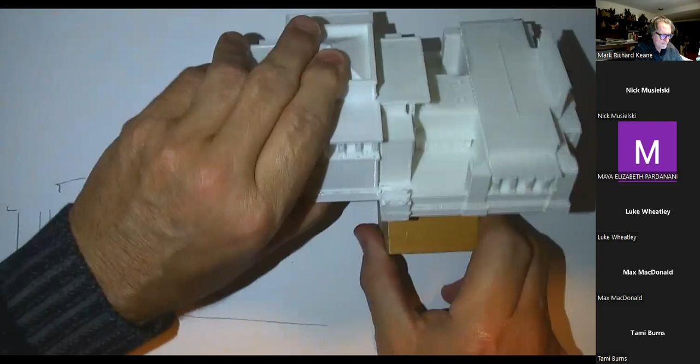Although, here's a point in reference about being a Madison student. Frank Lloyd Wright was born in Richland Center in 1867. I think I made mention of that in your email earlier. And he does well as a student - we'll talk about how he did so well as a student later on, because his mother was very controlling about how Frank was perceived as a child. And eventually he gets into college engineering at Madison. He fails in his second semester and never returns to college, and then becomes one of the 4 modern masters of architecture of the 20th century.

We're going to talk about how that can possibly happen, to go from Richland Center in South Central Wisconsin, not complete college, and then complete the most distinguished American architectural career, where he's the only architect that's been on Time magazine more than once. He's the only architect brought up to the level of Mies van der Rohe, Walter Gropius, and Le Corbusier at an international level. The other 3 went to colleges. The other 3 worked through sort of the language of the modern movement and the connections. Wright did his work almost singlehandedly with a lone quality, a lone wolf in the suburbs of Chicago, until he reached acclaim in 1909 and had his first international book published on his work.

So that's the story we want to kind of bring out and tease as you work through this and move through this process. So what I'd like you to do now - we're not going to draw now, we're just going to write and sketch. Get a blank piece of paper. We're going to work on the structure for the class in terms of how you work it into what you know about social histories and the language of the 19th and 20th centuries.

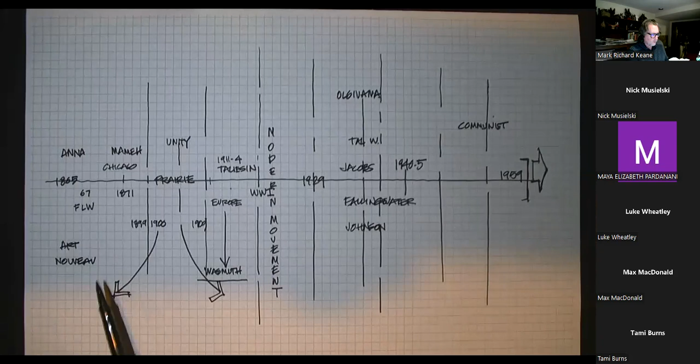And so that leaves us with the aspect of what Wright has meant to others, and that's what's in the book towards the end when we start to draw that. You'll see not only who worked for Wright in his studios, whether it's here or at Taliesin proper in Spring Green or in Taliesin West, but then who did he affect - who were outside looking in at his career?

And how does that idea of organic architecture still hold true today? That's sort of the path we'll talk about as we move through the book. So that's kind of the timeline that'll take us to where we are now and see what the language of Wright is here.

Getting back to this diagram, that's the part we're concerned about now, as architects in the Midwest and even internationally are concerned about, as these four seem stable. Jacobs is connected to the campus, and a retired art history faculty member brought that back to life. Johnson Wax is in place, the Robie House has been restored, and they've restored Unity Temple.

It's Taliesin now, which is the grand idea, because most of these projects emanate from it, outside of the two early ones. Falling Water, all of his major work from 1911 on, came from Taliesin. So not only is it a great home, it's also his think tank, his laboratory of ideas. That's where this whole push toward design, and what you could do in your careers, can make sure that's an integral part of the future of thinking about design in the Midwest.

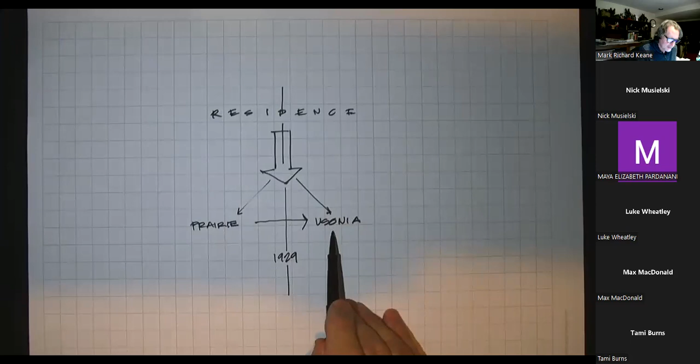They had more money, they came to him for the image of it, and they beefed it up, ending up with maybe a $500,000 home. But there are no really multi-million-dollar homes scaled in the early Usonia days. Maybe as more people became attracted to them, they got bigger and bolder and finished differently, but this is a different audience. So I want you to think about which path you'd like to take and work within that design language — that's your first choice. That's job one.

Because I'm assuming that's why we're all here: we want to design a home. And it's not something you can't do, because it'll take you less than a third of this class to do this. I'll show you all the principles and pathways to make drawing a home an easy thing to do, and how you're paid for it professionally, so you can run a career in residential architecture and make money as well. So the second step you have to choose is your site.

For many of you, this will be fiction. You'll find a piece of land, search on Google Maps, search in your neighborhood, or search on family property you might own, friends of the family, something up north. It could be a cabin-sized place, or it could be something opulent—you can design a palace. You're going to have a real client or a fictional client. You decide that too, or you could be your own client.

So those are the three things I want you to consider as you read the biography, as you draw in this class, and as you think about the ideas of Wright—his ideas that he's trying to purport, or the better way to approach design. You'll only show that you understand that by designing something with that language.

Your pathways ought to be very controlled here, because among our 55 students, there might be enough to shake it out so we have an even number on both sides. Then that group is going to self-critique each other, and this group will self-critique each other. So we split off. You might even have subsets within that to get you to dial in with 4 or 5 people doing something very like your scheme, because maybe the sites will be different.

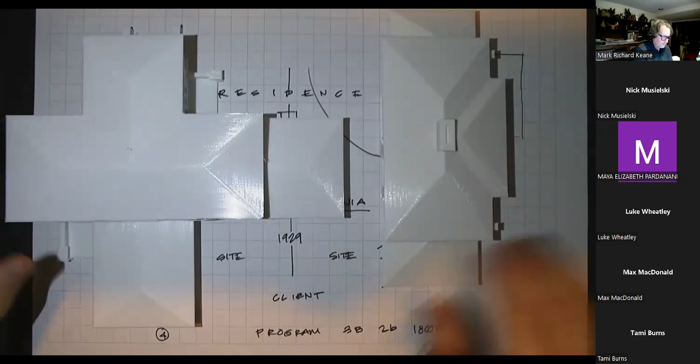Here are 2 prairie homes in plan type. They're both prairie homes. They both have the same type of roof pitches and stuff, but they have different clients and different sites and different scales. So they're part of a family of ideas. The same will be true for all the Usonian homes from the 30s on, without the pitched roof, without the basement, with cheaper materials and more of a manufactured tool type of detailing system.

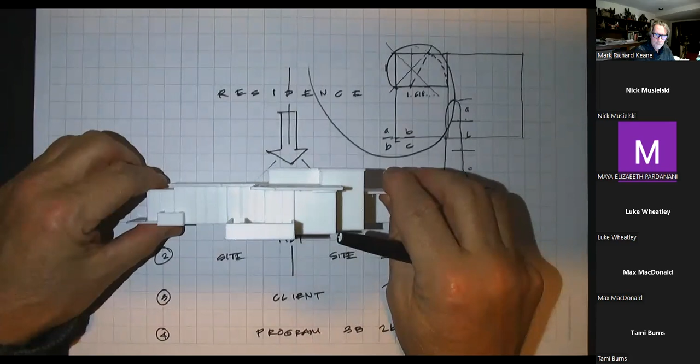So as you discover in the book, on your research, as you move about, as you travel to sites, you'll be drawn by one or the other. And you'll tell me in a couple of weeks which path you're going on, and then I'll have you do some presentation work for ideas. We'll draw some in class together as prototypes so you see what we're looking for. And all we're looking for in terms of the semester, it's not working drawings, it's not going to be Revit.

For those non-architects in the class here, there are 5 stages to doing, let's say, a residence. So the first one is schematic design. And that's what we do in most studios and most collegiate things. We just talk about the design of it in its sort of infancy. And rarely is it ever articulated.

Sometimes maybe in a senior level studio, sometimes in a graduate, you can get to design development and kind of complete all the design. But sometimes projects stop even at this point because it might be bid out kind of prematurely, and say, well, we're way over budget and we can't continue, when the client walks away.

If you do a good job, you take it to a point where you're moving towards the CDs, which are the blueprints. So the architect is doing 3 big phases here before anything breaks ground. It's all drawings and ideas about what everything's going to cost, what design decisions between the architect and the owner are going to be. And then you bid and negotiate with a third party, the contractor, and then you construction administrate, which means you build it. So if all phases work out, you have yourself a home for the prairie or the Usonian.

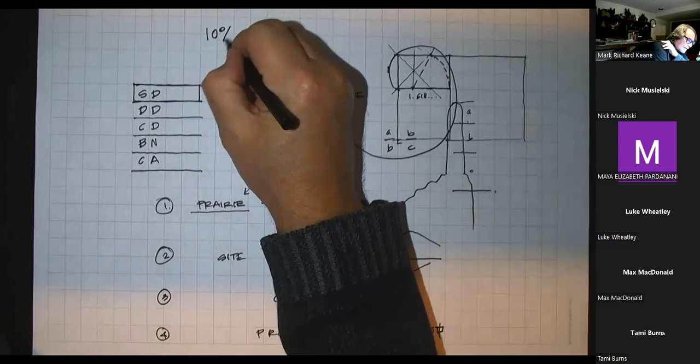Basically, after a certain time we'll give you a score for 10% based on your progress. We'll check back again around midterm and see how you've realized that, and then it's time for substantial feedback. When you're done, you submit it at the end of the semester, and it's reviewed in its entirety—the process as well as what your final project looks like. That's a chunk of your semester in terms of points towards the final grade.

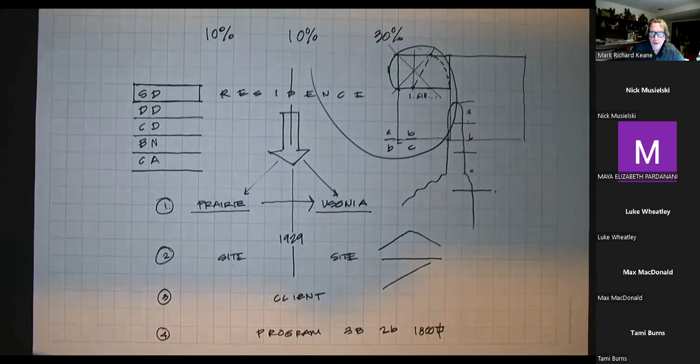Okay, so now you've got enough time to embark on the main course, which is always to draw within Wright's realm. For those of you who printed these out from the online file I sent, look down on the lower right and find the unit for Unity Temple, and follow with me on the architecture of this in the media of choice—Frank Lloyd Wright's choice.

You can do it in regular pencil now, or any media you want, but I'd like you to drift toward what Wright did in terms of working through all of his architecture—he worked with Prismacolor pencils. By and large, all of his renderings and design things, that was his drafting tool of choice, until it came time for his staff themselves to do the drafting. Then they switched to harder leads.

So I think for the bulk of the semester, since we'll have probably an hour each Tuesday to draw something, we'll stick just with black. But you need a whole array of them, like 5 or 6, all sharpened, instead of having to stop and sharpen during the sketch, so you can go for the whole duration and have it complete within that time frame.

If it gets too advanced or too fast for you, you've got that file you can go back to, reprint this, and start again, collecting the ideas there. By your second or third attempt, you'll be able to keep up probably stroke by stroke with this as we go through it. Later I'll move toward something more of a spectacle, when Wright would actually render fully in color.

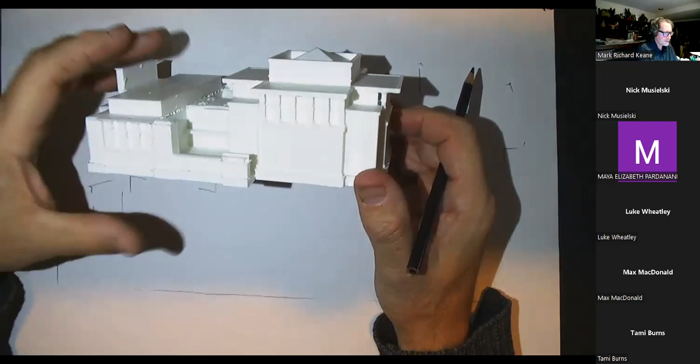So here is our view shed of the temple, started in 1905 and completed by 1908. We're looking from the parking lot side, because the street side has got a lot of vegetation and changes over the years. This is actually a cleaner image of the site that we're going to draw it from.

What's nice about it is the building itself is cubic, so we're going to start with that language and get it correct, then build all the other planes that fall off it to the left and right, north and south of the site. In all of our views, you can find great sensational drone pictures and odd angles, but I really like to have them drawn as if you're on the site and walking up to it.

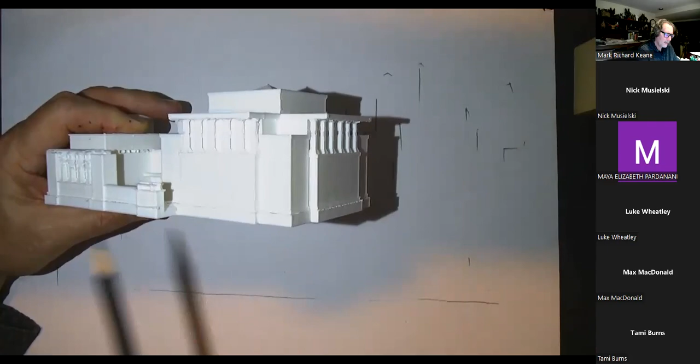So what we're going to work on then - I'll come back to the model periodically as we go, holding it up here in my left hand - is we simply want to find that horizon line. The tick marks show you that if you came off some of the horizontals I've articulated up here, you'll see the left vanishing point is coming off the page, and the right vanishing point, which is much closer to us, is driving down much quicker.

So they're both off the page to the right and left on 11 by 17, but now the bottom where the parking lot ends is beneath the horizon line. So we know those two are going to come to a point, and these two are coming to a point, organized by somebody 6 feet tall with a camera on this site. So all the way across here, absolutely parallel with the top and bottom of the page, is the horizon line.

So our first job is to grab the 5-fold openings here and drop that box down to ground and to its top, and the plane up above, which will protect that box in its day. And then the zones that we find on either side of this box, the pure cube, just like this was, we drew a second ago. And then when it comes to the corner of the plate that returns, I've drawn that here, and this one's going to turn, this is going to vanish back to the opposite point, which is on that horizon line. So somewhere between this line and that line, you're going to vanish that back. And then here, it'll be parallel to that, and then I'll come back to.

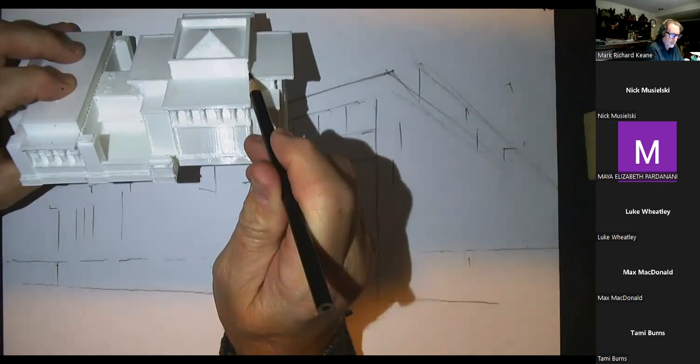We have a little bit of a bump out for the skylighting above the main space, which elongates the square into a rectangle. And we see one corner of that, but from this view, it dies back into this. We don't see it popping up beyond that. This comes down beneath the eye height of somebody standing next to it, and it's got a little bit of a base material that projects out as if it's got the feet of the cube being protected. And now that's going to rise from this corner back to this point off the page.

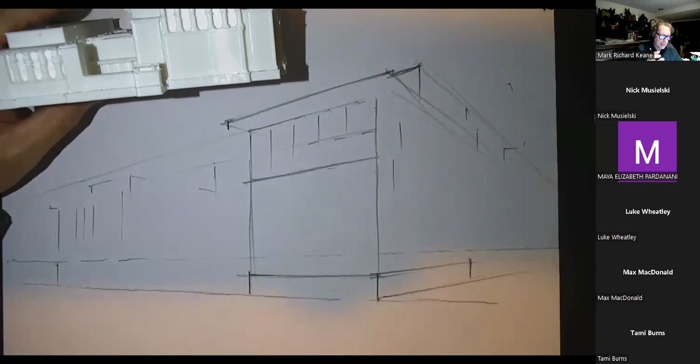So the reason why this is so epic too is that it was almost a budget issue that made Wright become more creative than he naturally was in the prairie idea, because those wealthy people had a lot of money to spend on some opulent materials. Here was a congregation that lost their building in a fire. And when they came back to build it, the budget, believe it or not, back in the day was $45,000, which is pretty modest. Even if you use that with inflation of what it would be today, you probably couldn't build this today. But Wright used what was probably the only material he could do to build it for the budget he wanted.

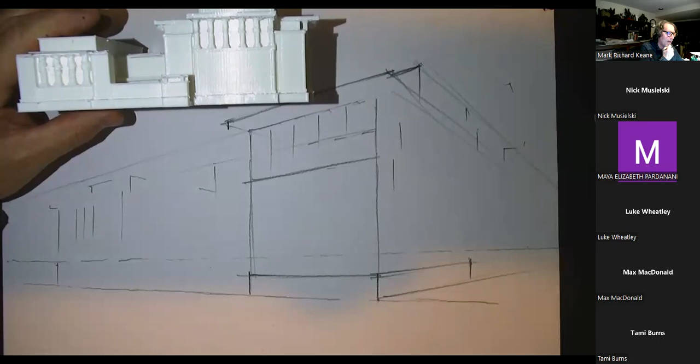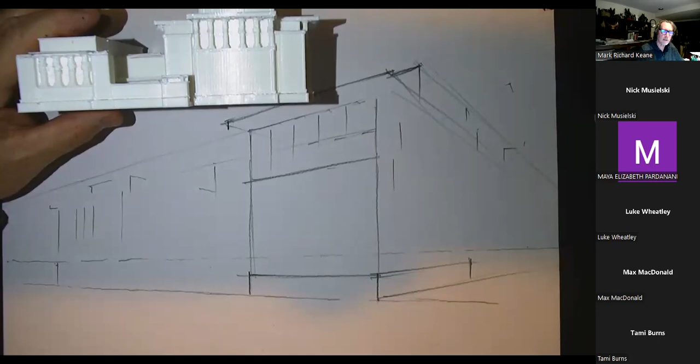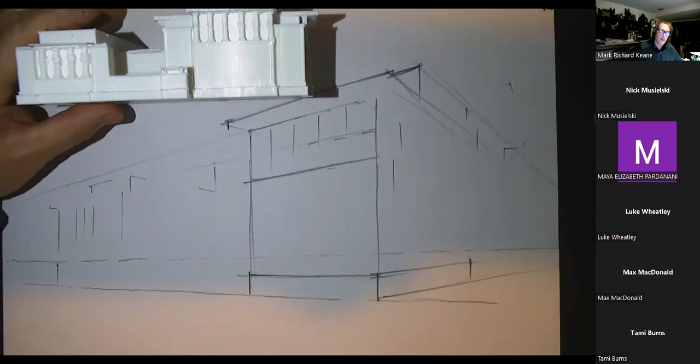And that was that single aesthetic change, the modern movement of reinforced concrete. So a lot of people historically, at this type of scale, consider this to be the first modern building in the world. That's why it's on this UNESCO site, even though it's still spectacular, even if it wasn't the first, because it was innovating with the material of the 20th century. They still call it a modern building, even though it's really within this Art Nouveau realm, because they hadn't talked about modern architecture as an actual field of history. Because really the word modern is Tuesday at 4 o'clock, anytime in history, that's modern architecture with a small m. Modern with a capital M is actually a stylistic period in the 20th century. And Wright's part of that before it begins. Again, that great anomaly there.

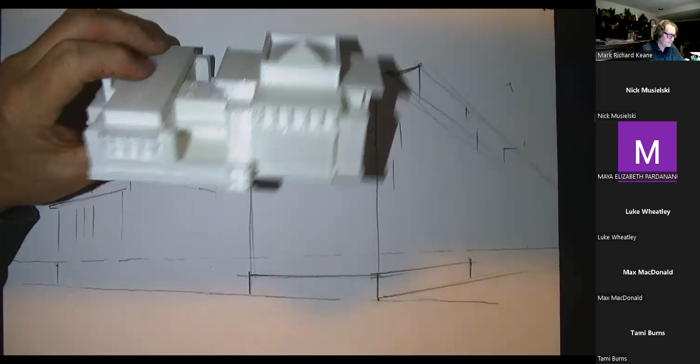So we'll come down to the other wing here and find the same type of patterns there, where there's an initial movement of pieces that fly up and a return down the corner that comes over on the side. And some of the pieces that you might see in the distance as the cube completes itself are going to be out of our vantage point because we are so low compared to the height of the building. As I tilt this up, they fall out of view.

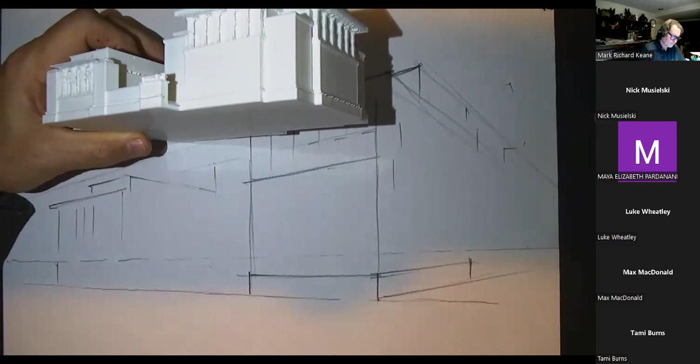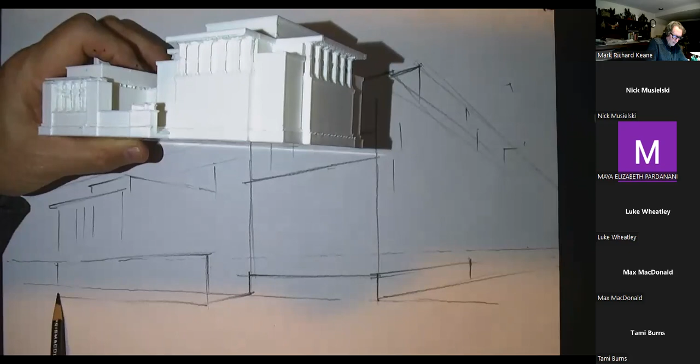Okay, so at this point, at the base of the cube here, coming from that left vanishing point, there's a piece that projects out, and it's the access point from the parking garage to that main court, to a certain height, which is almost a little bit taller than eye height, and then comes back. So we'll run this piece back. And that'll be the base of the community center on the back side.

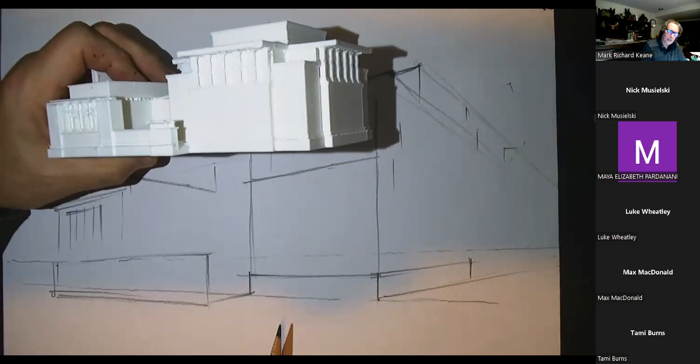And there are 4 zones for the openings for the community center back there, with its pop out on top. And that moves all the way across the site because this is a rectangle in plan. So it's got kitchen areas on one side and more congregation areas. And so it's breakout rooms for the children, for benefits, for things before and after the ceremonies.

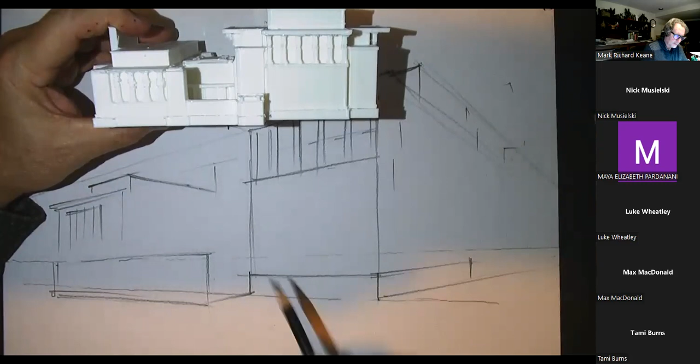Okay, what we can do right away is turn to some of the detail to show some of the massing. So each of these elements up top are actually piers that rush up that height. So 6 piers given the 5 spaces, and then beyond them in terms of depth, as they go back before they meet the wall behind them.

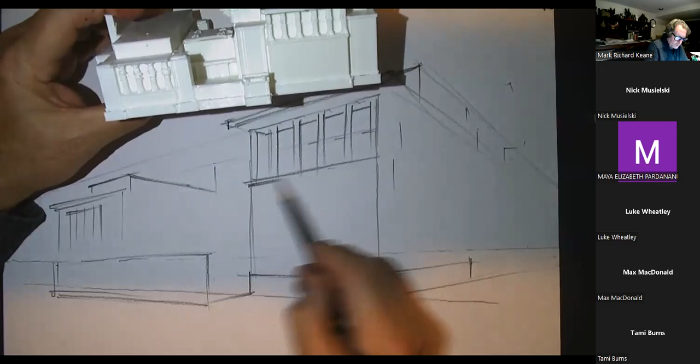So there's a little bit of almost like a porch made out of those elements, and we'll double up that size as it floats over that porch. Much like the base here, there's a base of those piers that rise up, and they'll turn the corner briefly here, as you see by this column, to this point. Then this insets as a plane before this corner pier takes over.

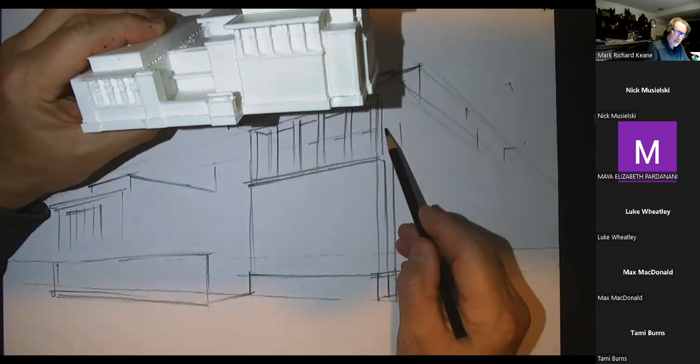So coming about this height on either side, right across this whole element, there are 2 major piers that block down. So there's a square inscribed in a larger square. And so these piers will come out and then drop down to the corner.

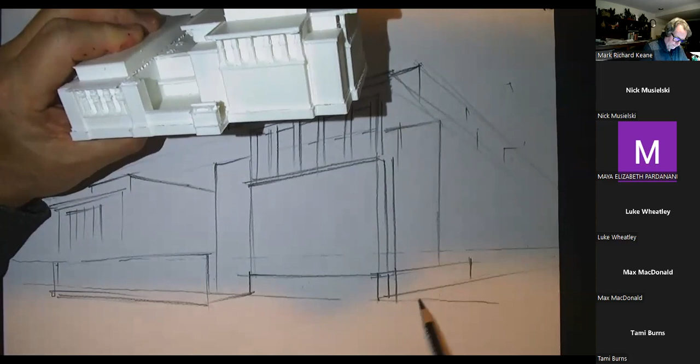Now, as they run around, the images on the side reflect all 4 sides of this. It's broken up by the atrium that connects here, but it's meant to be in entirety as this thing's in the round, even though it's a square form.

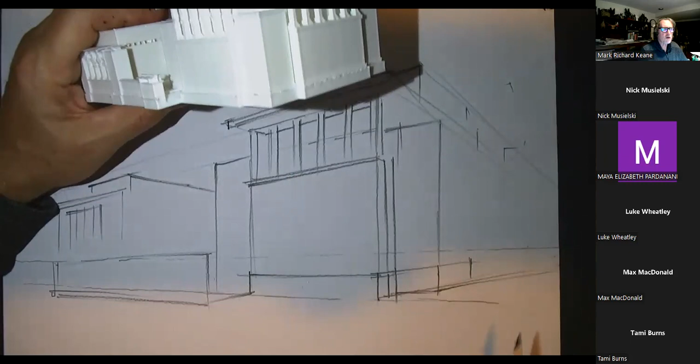The issue in terms of how its nature is used is that on the street side, to buffer the sobriety of this reinforced wall, some of the writers in Chicago called it a Mayan courtyard when it was first built, because people didn't see reinforced concrete just as the actual decorative element itself. So what they did was they planted more opulent trees on this edge.

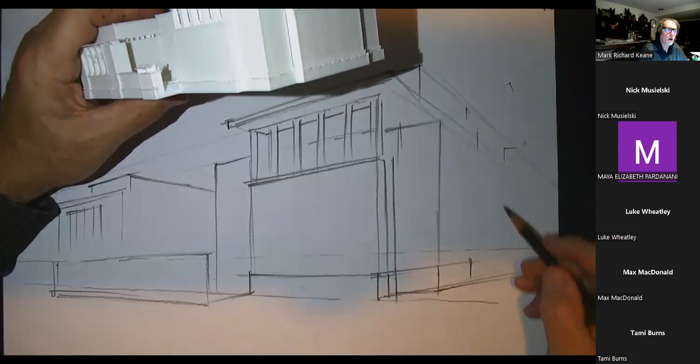So this is a technique that Wright does for the language of architecture. We'll use that to frame the sketch and the drawing itself. So as the top of the square tower comes by and has its return, instead of seeing the corner of the building, it's going to be met by the language of the architecture.

Of nature herself. So we'll start with just some lines here, which will allow us to have the sketch move off the page in perspective, but blunt our eye. Because the only thing you don't want to do is have the end of a perspective come close to the edge of a piece of paper.

So we're going to sort of waffle in, not as a subject, this is an idea of vegetation that'll come down to eye height so we can see beneath it, so we can see some ideas of the grade down below.

But that'll be secondary information because it's around the corner. So this happens on this side, so we can simply carry this over at the same height and then run that line down.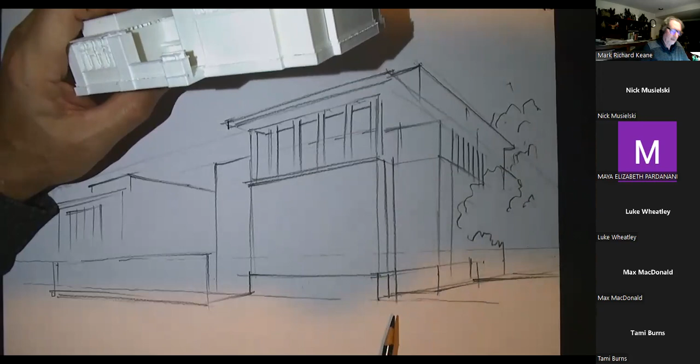And then popping out from that corner, once we get around the pier here, are 5 openings. They're going to be more compressed in terms of how we see them on the end of the building, rotating around, and a very large projection of a roof line that'll run that way too.

On this side of the community, it's going to actually wrap around too, as the boxes keep enforcing the idea of a volume, repeating the volume adjacent to it.

And then right on the corner, as you make your entry, whether from this side of the parking lot or the street on the other side, there's actually a nice detailed type of parapeted plant hanging where the planes project off from that corner and create a vessel there to have vegetation on top of that, and then setting down on the plinth of that corner pier.

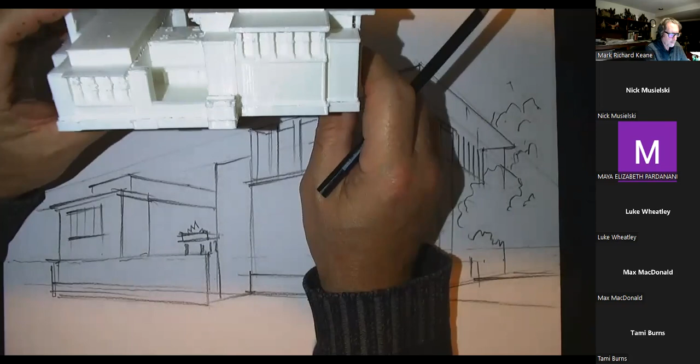Okay, so now that the perspective of the boxes is kind of achieved, the next thing that's going to help us move through this is to move the pattern of light. That will be more from a photographic view rather than the model, because things get washed out very quickly holding this here.

So I'll keep it as a reference, but it's not going to match what the model is. It's going to match more of what it'd be if you were there on an early morning in the summer and the light's coming in from the east.

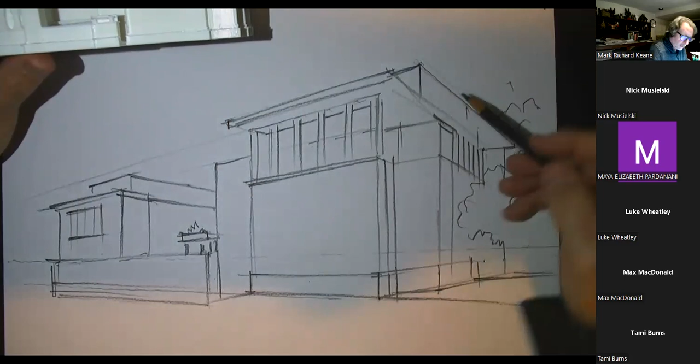So what we're going to do is make sure on the north side it doesn't receive light. We're going to come up to this whole zone up here, and we'll put its little band on the top, and we're going to make this whole edge of our skin in shade. We'll wash that over there to make sure we've identified that as the principle of that being darker.

And now this piece is going to come over, a longer projection here, and have that underside be darker. And now the whole north side gets a wash as well.

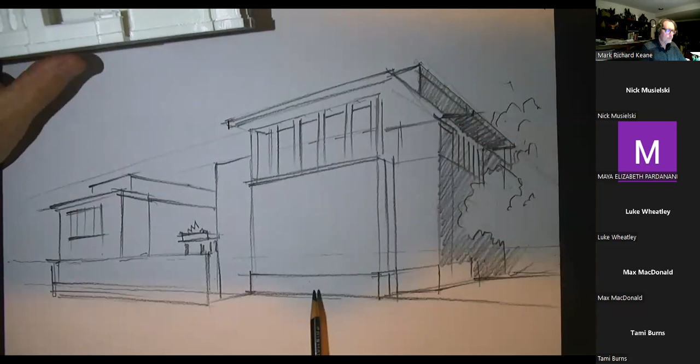The side of that faces north, and these two face north as well. The one side of this goes back and is gray, and the edge above is grayed out.

Now the fascia, which faces directly east, is brilliantly lit by the sun, but its underside, the projection of the eave, is a wash of dark. That comes down a certain distance on all of our piers here and then stops, so that'll be a cast shadow. It'll come back a little bit darker later.

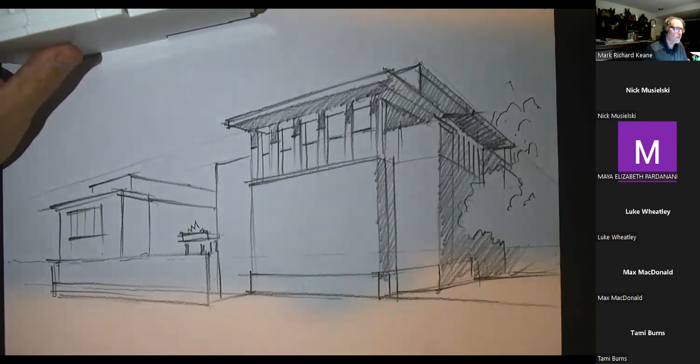Obviously the windows between these elements—here's the other side of all these piers—come down about halfway to light the congregational space inside, but not provide views out to anything in the area. So everything's happening in the lower two-thirds, meaning there's no direct distraction, like somebody giving a sermon where you'd be looking outside. So it's a very controlled environment inside, almost like a geode, a very crusty rock formation on the outside, but a beautiful sparkly space on the inside.

Here's the thing about windows: we can wash all the stuff that's not receiving light—that's architecture. Windows people tend to think are going to be bright because they're lit up, but in the daytime, even with lights on, there's still a dark space. That's what helped us achieve the idea of it being dark, by coming in and doing the darkest yet we've had, to show it being inside, away from the sunlight.

So a darker volume, and then coming down from where the sun casts a shadow onto these piers, it'll come down at an angle on all of its sides. So we can also make those a little bit darker as well, and that animates the top of that box and shows the play of light as it moves across the space.

So we'll come over here—this is all in eastern light, so that's a good exposure. This wall actually comes around, so we see one side of it. There's just a line break between construction there.

The edge of our piece here doesn't have light on this side or the wall we're walking by. But the wall does, at the angle the sun comes down, cast a shadow on that part of the building back over here, and then throws it a little bit, as the sun is still early morning, onto the base at this point.

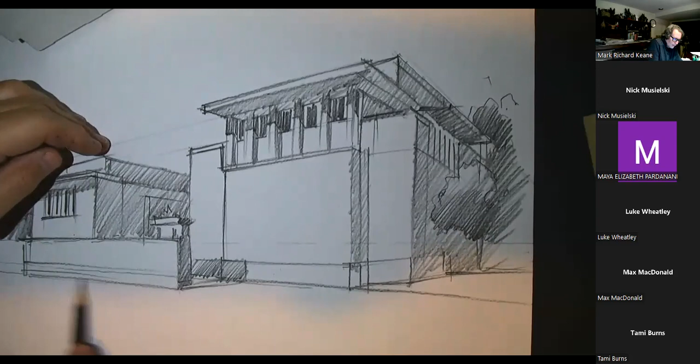One of the things we can do right away is create that ground plane, which has a base to it. This part of the parking lot ends, and that's more of a walkway, so that helps out there. The language of this is just a flat plane with parking lines to it, which is interesting, just adjacent to it, but it does have a tone to it.

I'd like to come up to this line and start to bring a nice wash of tone that comes and has the white sit on top of it. Again, you're not using the point of your pencil, you're doing an oblong shape that gets chamfered off as you wash this back and forth, and have that come all the way over to the right of the sketch. Even near the base of the building, you want the lawn to be darker too, so it sits on a nice tight dark ground plane.

Now we've got the weight of all this reinforced concrete plunking down and coming out perpendicular towards us. To help the line work, we'll come from the building and do a couple horizontal lines to go all the way back to that right vanishing point, which will help set this down as a horizontal plane. Then maybe come back in and wash one point more heavy than the others, to nuance it a little bit.

At this point, since it is more of a walkway, you could actually have concrete construction joints there to kind of give the way.

I think we've done enough in terms of placement of where our values are. There is a 5 or 6 story residential building way behind it, but that's our prerogative - we can leave that out of the sketch here now because it wasn't there when Wright built this.

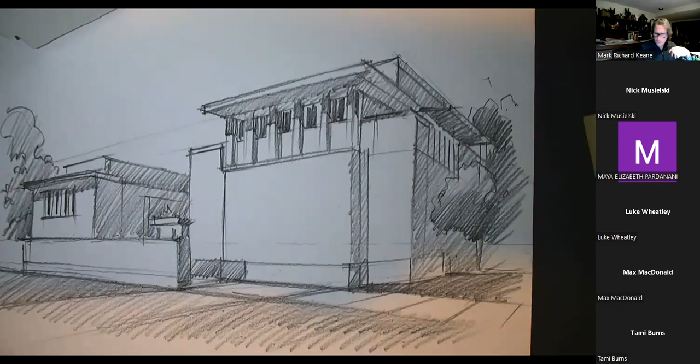So what we'll do now is go back in and move ourselves toward that language of the black. We've got all our white we want - the sun's doing a great job here. There's a little sliver of light for a vertical window that comes at the joints between the exploded square around the central square. That'd be nice to pick up.

There is a detail here where this piece ends and then this butts out and comes down a little. We could probably call out that one again to get the shape to modulate more. And then we'll double up on this dark a little bit.

You don't want to wash out all the white there because even though it's on a shade side, you want to have some highlights in the shade. So wherever planes in space meet, you go back into that edge, and make it darkest right where they meet, and then fan back. Darkest where it meets, then fan back.

So now that white's more prominent at the most important part of the sketch, which is right where the corner turns here and goes on the north face. It's got to be darkest right here where it's against the sky, even though it's a white piece, and it goes to white. Underneath, it's darker right at the edge by the sky, then it can become a little lighter, then maybe darker over here on this edge.

Now we go to the window area - I did sort of a dark gray there, but now we want to put jet black in there, but not in the same spot. We want to animate that and put some highlights of just splotches of dark that show that stained glass and light do different things and bounce around inside these windows. That way it kind of intrigues us more in terms of looking at the detail of the space as we move back into it.

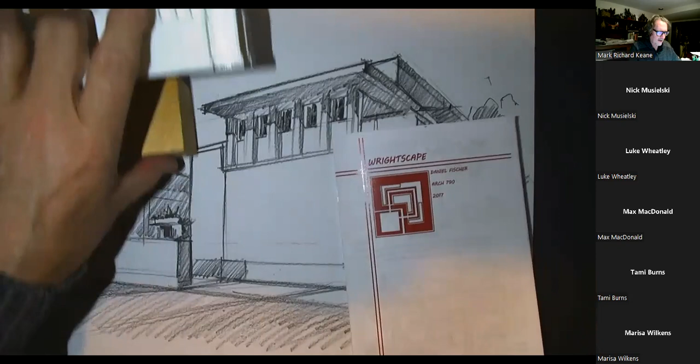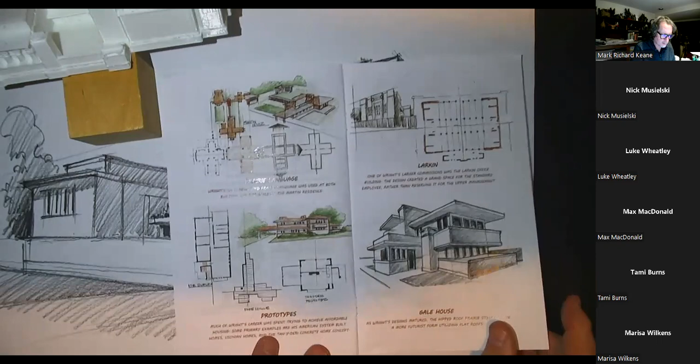I think there's a total of maybe 32, 33 films you look at in the course of the semester, and you can determine then your connection to this idea, because when you pick up that tool and use it on paper, you're actually following in the language of Wright as close as you possibly can. So you can never get that from just reading a textbook or listening to a PowerPoint - you have to be an active learner here.

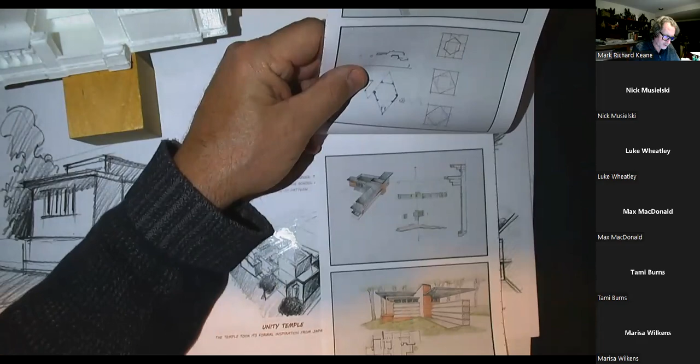So here was a CE student from Madison that eventually came and did his master's here in architecture. Actually went to Paris with us this past summer as well.

There's another cover page. Here's a student that integrated some historic photographs as well. At the end, they can add their project imagery too, for the stuff they're working on for the residents.

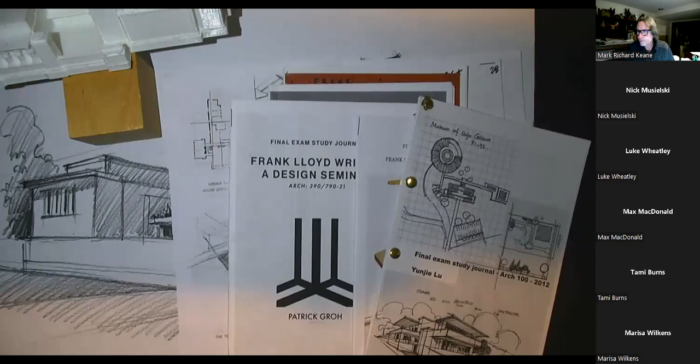Luke, your book's on the way, I hope. I mailed it off today. Great, thank you very much. But it's university mailing, so it's not going to be anytime really soon, but hopefully before Friday for sure. Absolutely, no worries at all.

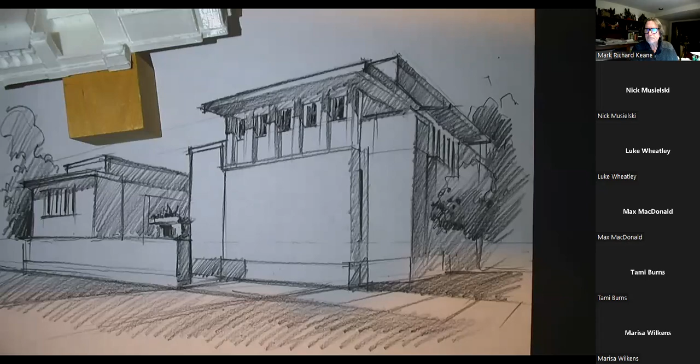I had a quick question. Sure. I'm a Madison student. Yeah. But I'm not in Madison - I'm in Denver until middle of March or end of March.

So my first question is, how do I get the book? Should I have my friend grab it from the engineering building? Yeah, if you got somebody near the building, have them grab it and mail it out to you. Then you'll have to look at the file of all the base drawings that have the little tick marks on them. If you're in Denver, just go to a Kinko's and print them out 11 by 17, then you're all set. And you guys have to use that one code the tech people in Madison did, to access our Canvas as a guest.

I'm on the Canvas, I got that. Okay, just to clarify, the book that's going to get sent to me, that doesn't have the tick marks - I have to print those out separately, right? Print what out separately? The pages with the tick marks, like what you did. Right, exactly. Yeah, the 11 by 17 is a different file. So you'll keep those images outside the little tiny book, but you'll scan them and probably put them in there and show me anyway. But the book is going to be drawn on the Canvas files.

Okay, sounds good. So get the book and print out those other things. Yeah, once you see it, it's going to be very straightforward. We've been doing this for years and it works out pretty well for most everybody.

And then last thing - just to tell my friend, he goes into the engineering building and asks, hey, I'm taking the Frank Lloyd Wright class, I need to pick up my book. Yeah, the front desk for the College of Engineering and Applied Science. It's not going to be on the first floor, I think it's like room 1429, something like that. It's in the email.